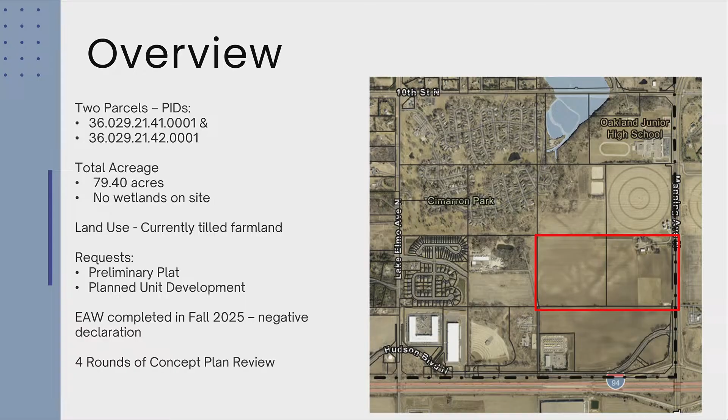So generally at a high level, what you're seeing are 679 residential units. This is an entirely residential proposed subdivision. Those units are broken out between 67 detached single-family homes, 60 patio-style townhomes, moving generally from left to right on the plan in front of you. Then 161 urban townhomes in the northeast corner, 3 multifamily buildings on the south side of the project, comprising 271 units total, and then 1 senior living building on the southwest or southeast corner, with 120 units proposed.

On the center of the site, just want to note, and we'll talk about this in more detail, but you're seeing a park area that's roughly 9 acres with stormwater ponding, adding to that open space in the center of the development.

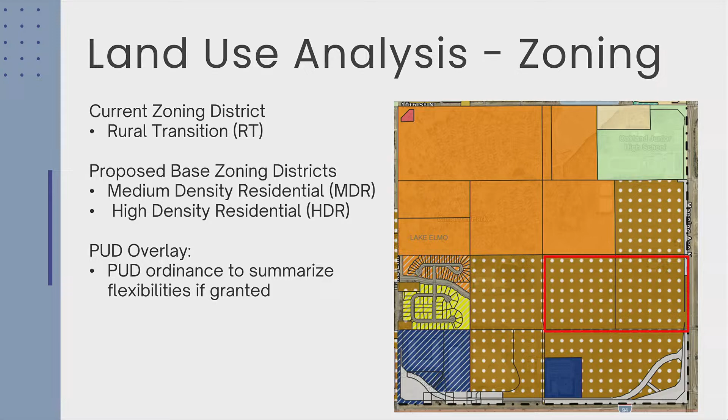So from a land use perspective, this site is currently zoned rural transition. As you know, that is a zoning district that is kind of a holding district for lands that are imminent for development. The future land use map has this land guided as a combination of high-density residential and medium-density residential. And we have a planned unit development proposed, so there'd be a PUD overlay from a zoning standpoint.

So when looking at the comprehensive plan, you have a pretty interesting line between the MDR and the HDR if you look at the site. Generally speaking, the intent when the comp plan was adopted was to concentrate the higher density development towards the south and the east side of the site, which is where that dark brown color is. The orange color is the MDR area, which transitions as you go to the east to low density.

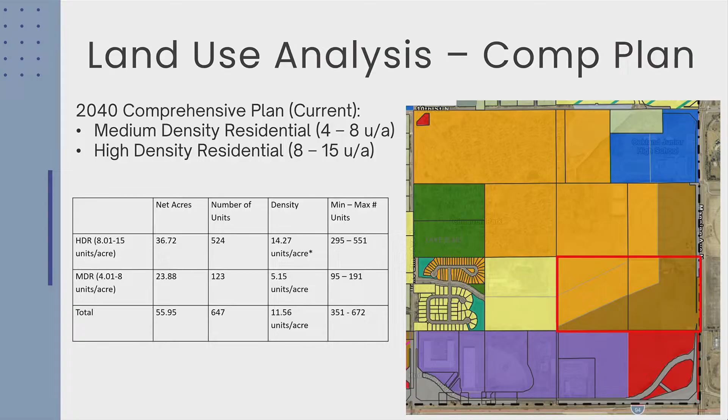But with the preliminary plat come all the preliminary plans, the development plans, those have been reviewed in detail to see whether they meet city ordinances.

Really just quickly want to cover planned unit developments. The city does have several different criteria in order for them to be considered. The first is whether the property is over 5 acres, and that one's met. At least 20% of the development has to be held as open space, which can look like common areas between townhomes and things of that nature. And lastly, the street layout has to maintain the existing street grid or meet the plans for future streets.

There are a number of PUD objectives that the applicant is basically stating in their narrative that they are meeting. Those are a range of different things, like providing a mix of different housing options in the city, and doing things like stormwater irrigation.

Now I'll just kind of jump into that preliminary plat review. When we're looking at a preliminary plan set, we are looking at a number of different things, and we'll walk through those here. So here's just a refresher - here is that overall site plan, and then I'm going to walk through each of the different elements that are being proposed here in a bit more detail.

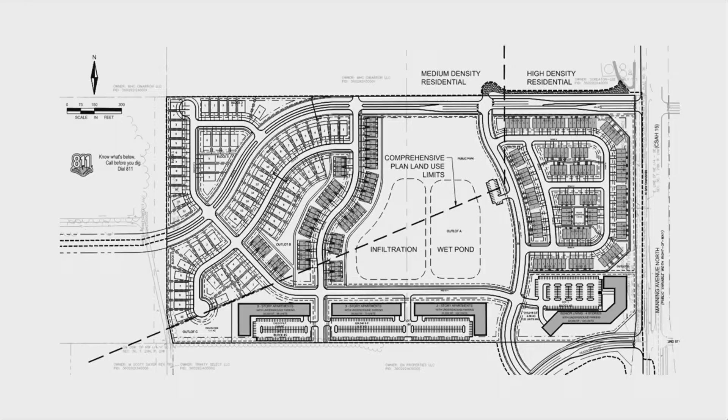First, you have the single-family homes. These are in the MDR, medium-density residential part of the subdivision. These are proposed to have 50-foot lot widths, which would be meeting the city's minimum. Pretty standard lot detail is shown here with those lots.

Next are those patio townhomes. These are the townhomes between the single-family homes and the proposed park area, kind of serving as a little bit of a transition as you go to the east. These are a little bit more standard townhomes, which you'll see around the city.

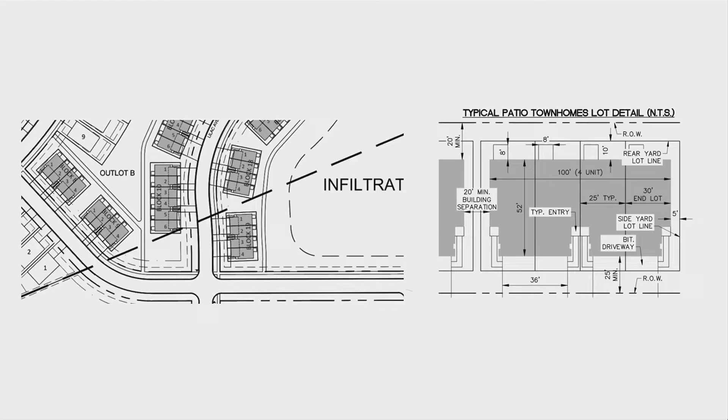We have 3 apartment buildings shown on the south side of the site. These are, at this point, I think there's no known developer for these apartments as far as I'm aware. And lastly, if you look at the southeast corner, you're adding in that senior living or age-restricted apartment building.

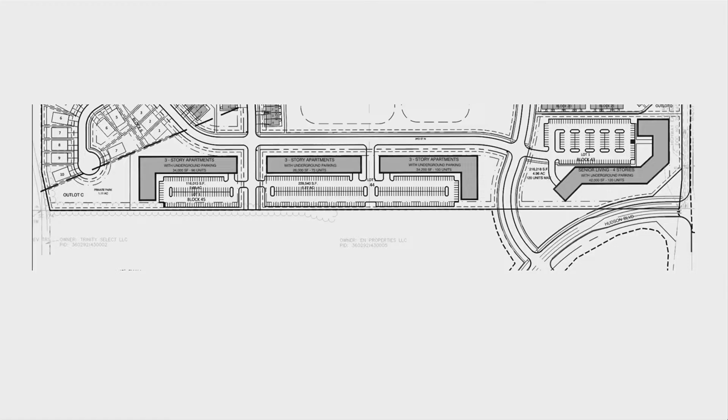And then here are what we refer to as those urban townhomes. I just want to make a quick note - what was included in the plans that were reviewed was an urban townhome with 129 units. In fact, the developer did provide a different layout that they actually prefer more. This layout was reviewed with the concept plans and it was reviewed with the environmental assessment worksheet when that was reviewed, so this has been reviewed already by the city.

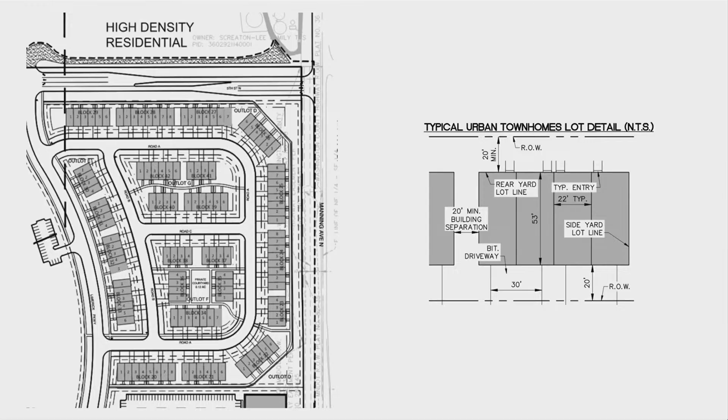This is the preference for the developer. They're going to be submitting an updated plan set. Generally, the differences are listed on the screen. So 161 units is what they are actually proposing. They're also proposing to have a larger private courtyard. In the site plan that you see on the screen now, you see just over 0.1 acres of private courtyard, so they're looking to increase that area.

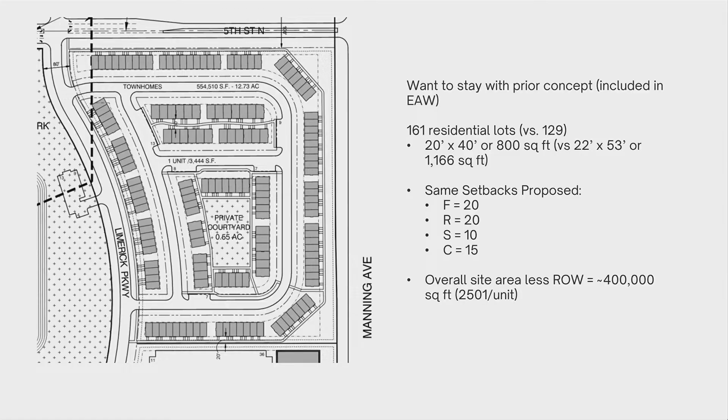And they are still meeting the setbacks that would be required in this area from just the zoning code. So there is a little bit of a difference - the units would be a little bit smaller, going from just over 1,000 square feet to 800. I did take a look at the overall site here. If you look at just the portions of the urban townhome part of the development minus the right-of-way, they are meeting the requirements of code to have at least - the requirement is approximately 1,700 square feet per unit.

I also really quickly want to touch base on the density for this development. That's been noted in the staff report. In February, we received a different methodology for calculating density for development from the Met Council. Because this development was planned largely before the Met Council changed that methodology, staff are proposing to use the methodology that this development was applied for under, which is showing here, and it's also indicating that the development would meet the overall density range for this area.

So I'm going back to these are the bulk standards, we call them, things like lot area, setbacks, etc. This is a planned unit development.

The developer is requesting a couple of different flexibilities from the city. First, just looking at the areas highlighted in the staff report - for the MDR, the single-family home lots are proposed at the smallest on the small end at 5,400 square feet, and they range up to some larger lots over a quarter or half acre. So it depends on which lot, but the minimum proposed is 5,400 square feet. The city standard is 7,000.

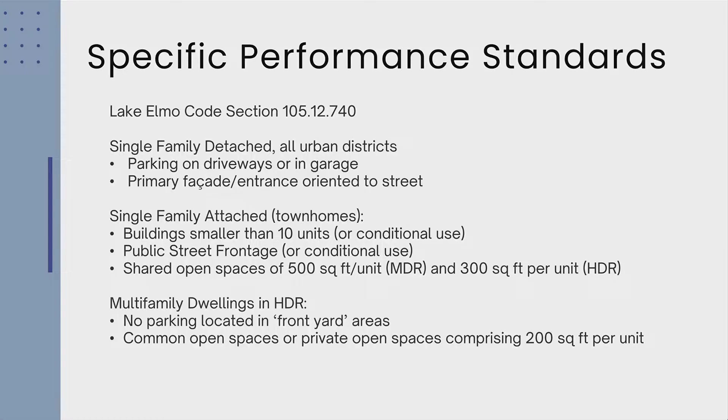What I haven't mentioned yet is that this project is not next to any existing developments - it's non-contiguous. So the developer is going to have some off-site improvements required to bring in utilities and road infrastructure to serve this new development. On the west side, that's bringing in a water main connection. And south of this site, the developer will also need to bring in water main, plus sewer to serve this property and realign Hudson Boulevard.

That realignment has been planned - it's been a long time coming in that area. The developer will accomplish that requirement through their alignment of the utilities serving the project, so that's been a requirement as well. They're also building Fifth Street North, which is a planned connection from the city's comprehensive plan. Fifth Street North runs on the north side of the property, and then as you go to the west, it curves down a little bit to the south.

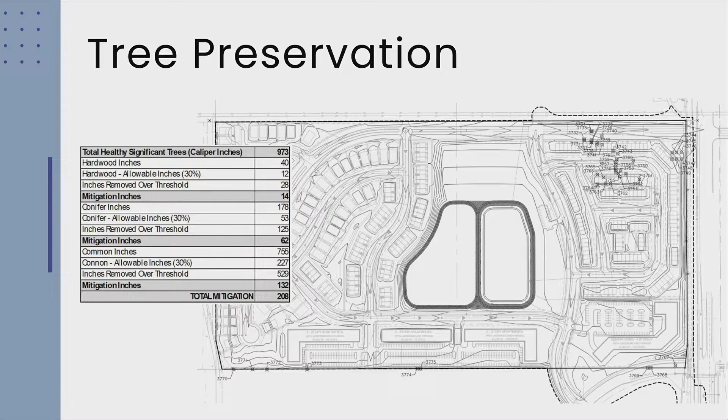Okay, so I want to shift into tree preservation and some of the other site considerations. There are a number of existing trees on site. Because of the way the grading will occur and the way the development is proposed, those trees would be removed. So there is a mitigation calculation that was provided with their plans and reviewed by the city's landscape architect.

The developer is also proposing to replace those trees with new landscaping. This landscaping would be provided throughout the project, and it would include trees that mitigate for the trees that would be removed.

Lastly, on this screen you can see some dark or shaded areas in the common spaces in the townhome and apartment areas of the site. The developer is proposing to use stormwater reuse, using stormwater to irrigate the common areas on the site. That has been a common theme in new development in Lake Elmo to help reduce water use from new development.

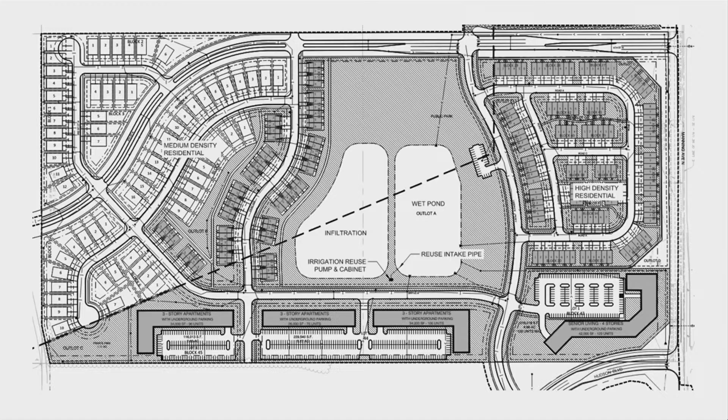So we've looked at a number of different plans. The landscape architect's memo dated May 18th does list a number of requirements that will need to be met as we move forward in the process, should there be an approval.

I also want to quickly note that buffering—the apartment buildings shown on the south side of the site—development that occurs south of those multifamily buildings, if it happens in the future, would need to provide some form of buffering or mitigation between a future use and the apartments.

We also looked at parking and traffic. Parking has been reviewed for the uses within phase one, which includes the single-family homes and the townhome units. Those definitely meet requirements, providing enough parking for both residents and visitors.

Where we have a need to review further in the future is definitely for the apartments, where we actually need a specific unit mix to assign a certain parking requirement. So when those projects are proposed and we have a known unit mix, that's the time we can really refine the understanding of what the parking requirements are. At this time, no flexibility is being requested for parking.

As far as traffic goes, this site and area has been guided as medium and high-density residential for quite some time in the city's comprehensive plan. The comprehensive plan does plan for the required infrastructure to serve these units with roadway and other infrastructure. The EAW also included a traffic analysis that was reviewed as part of the project.

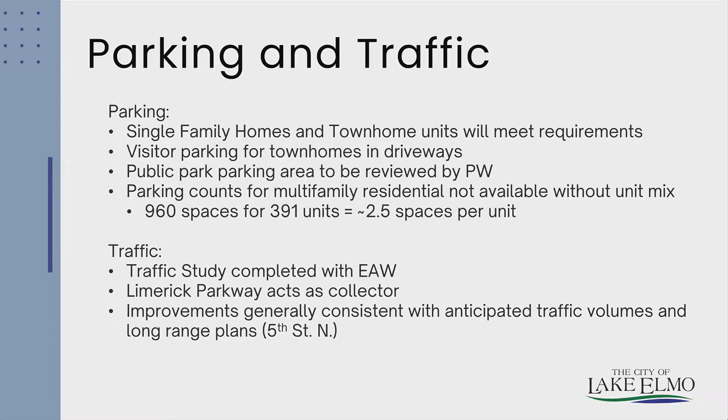All right, so access—I just want to talk about a few different things with respect to access. We've talked about needing to realign Hudson Boulevard. That's an important planned realignment and will provide key access for this development to Manning. There will also be construction of that portion of 5th Street North through the site, so those will be the two points of access that serve these units.

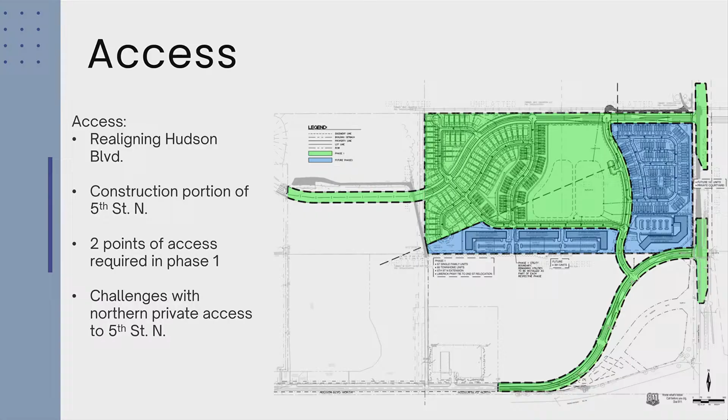And I do want to mention, there is an existing grain silo operation on the property just north of this site that creates a challenge for these plans and how that access can be retained. And so here is what is shown in the project plans.

You can see there's quite a long access from the right side of this image, where the grain silo operation would be, along Manning. If you go all the way, it's about 600 feet before you hit that next intersection. That's representative of the city's access spacing requirements, which are standard for 5th Street North.

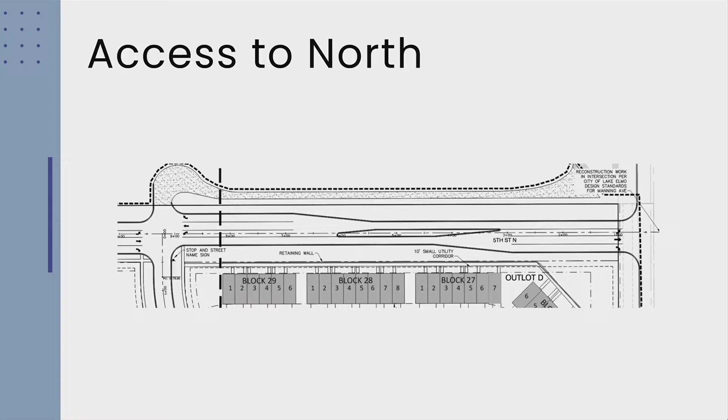What's being proposed right now by the developer, in conjunction with the property owner to the north that has the grain silo operation, is kind of an alternative access for the time being. It's a little difficult to see on the screen, so let me get a laser pointer to show up here.

As I mentioned, the property owner and developer have worked together on this proposal. What's currently proposed is an access serving the grain silo operation directly onto Manning, which would be a right out only. Serving this grain silo operation from the 5th Street North corridor would be an access directly from 5th Street North, which is a city road. Manning is county, 5th Street North is city. They're proposing a right in to the site here.

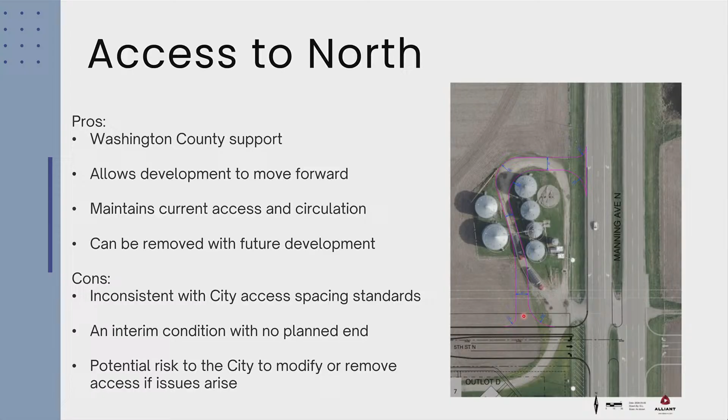That trail corridor should run continuously along the north side of 5th Street North through the project. That's been a long-term plan for that parkway through this area, eventually providing connectivity up to Oakland Middle School.

Parkland dedication.

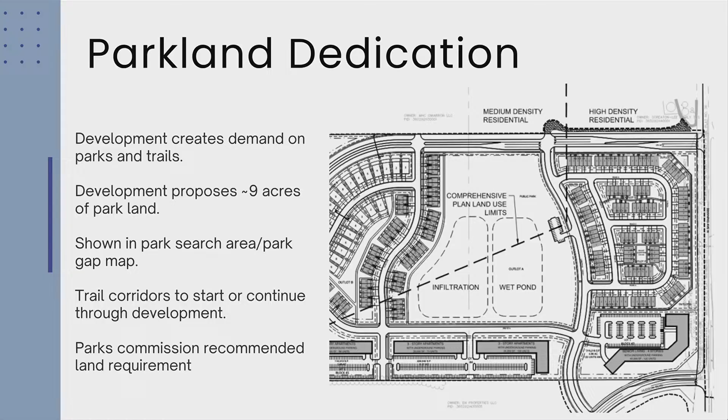This project proposes to dedicate roughly 9 acres of parkland that would surround two stormwater features: an infiltration basin and a stormwater pond. This part of the development would serve the residential units with parkland and recreation space, and would satisfy the city's park dedication requirements for this area. I'd note that this part of the city is within a park search area for a neighborhood park, and this park would generally meet the criteria for a neighborhood park, particularly in terms of size and area.

There have been a number of review comments provided on this development and lots of coordination behind the scenes. The city's fire department, city engineer, and city's landscape architect have all reviewed and provided comments included in the staff report. South Washington Watershed District is still in process for their review, and Washington County has also had an opportunity to review.

Just a quick summary of the proposed PUD flexibilities by the developer: number one, minimum lot size for the detached single-family homes, the townhomes, and the multifamily buildings, and then a side yard setback flexibility proposed for the single-family homes.

There are findings required to be created for approval or denial of a project. Those are generally summarized on the screen and included in the staff report. Staff generally feel that this development meets the city's criteria for approval in this part of the south growth area of Lake Elmo.

So you have a number of options in front of you: you can recommend approval, approval with conditions, denial, or table. Staff are recommending approval, but with conditions, and there are 12 conditions shown, generally summarized on the screen here and in the staff report.

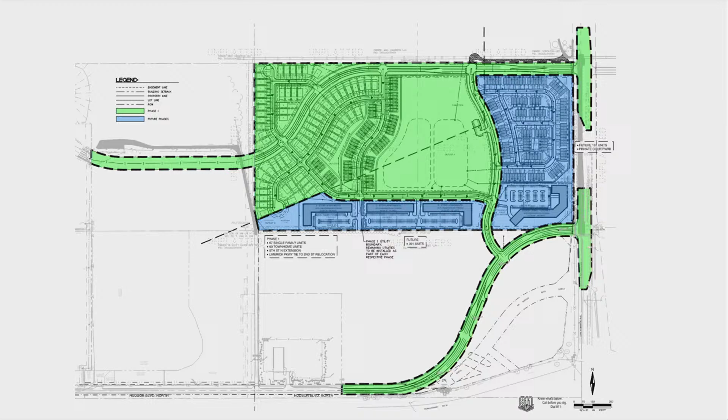How about the property to the west and south for the realignment of Hudson and Fifth Street? Are those private property owners on board with this, or does the developer control that property as well? That's a great question. The developer has been coordinating with those property owners. One of our conditions for approval would require that they get an easement agreement on the city's form. There's a big difference there, right? That would allow us to confirm they have consent from those property owners to do the offsite improvements.

And then when they're constructing the improvements, since that agreement would be in the city's form, the city would have the ability to go and do inspections and do those types of things. Gotcha.

Has a traffic study been done on the grain silo operation where you're effectively going to be routing grain trucks through residential areas with the proposed route to give them access?

Certainly, that's been an area of ongoing discussion. When we look at the grain silo operation, our understanding based on conversations with the property owner is that most of the semi-traffic won't amount to much per day. The peaks are relatively minimal in terms of traffic.

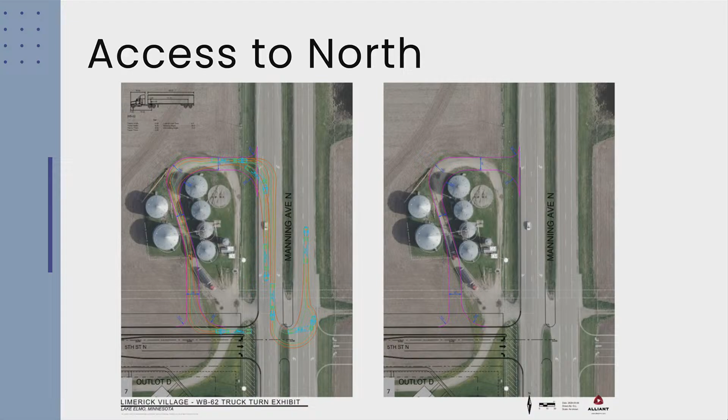Most of that traffic would be taking a right south on Manning to access the freeway corridor. I just know the county has a way of removing access from roads unexpectedly. Washington County has certainly been part of this review process. They've indicated they'll be issuing a permit, which they'll have to do for the project to move forward for access, so that's how they'll control that. The developers also had to talk with Washington County, so they might have thoughts on that as well.

So the quarter mile spacing isn't applying in this case, because they're giving them a right-turn exit. Typically, when you're looking at a permanent new development, you'd go for quarter-mile spacing or less in some cases, depending on the context. But because this is a somewhat unique condition with this grain silo right there, and wanting to reasonably retain their access for their operation, they're asking the city council for some flexibility.

As for the developer's cost, yes, the developer will be responsible for reconfiguring the access.

So with the new Met Council density calculations, isn't this too dense? The density is above and beyond what's required. The reason for that is because the developers would technically not be able to net out the stormwater pond and the Fifth Street North corridor. So technically you're right, but the density functionally hasn't changed from when the city reviewed this before. Right, but by the new calculations, we're exceeding the density requirements with the new methodology.

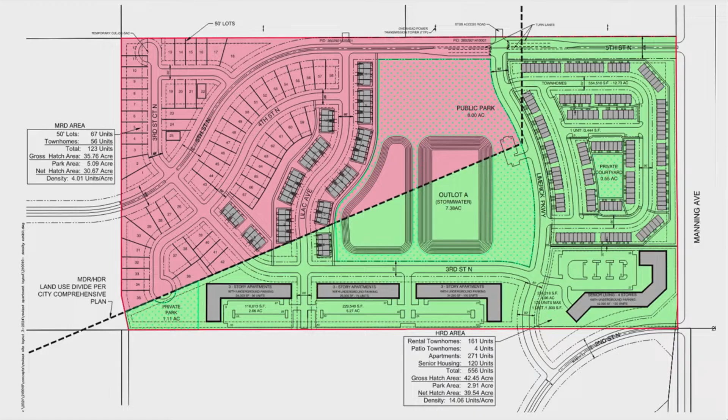They're in the HDR, the high-density part of the site. But when we look at density, we don't look at one individual part of the development. We have to look at the overall area of HDR, high-density residential, which in this case has a unique shape. Part of the reason for those four concept plan reviews is because they have a really funny line here, and the developer worked hard to not propose a comprehensive plan amendment, so this development could use the existing plans the city has in place. They've had a challenge trying to meet that boundary, and that's part of why it feels like they're high on one side and low on the other, which bears out when you look at the density ranges here.

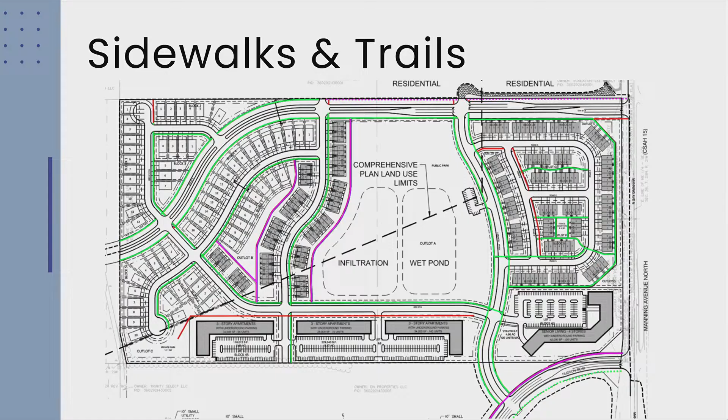One more question on Manning—is there going to be a trail on Manning at all? That's a good question. Right now, as far as we know, looking at an aerial, there's no trail along the west side of Manning. At some point in the future, the county may have a trail, and I think usually the county's standard is to have a trail on both sides. Oh, okay, so that'll be up to the county. All right, good, thank you.

Thank you, Nathan. Let's try and find a site plan for the developer to speak to. Does the developer want to speak?

Thank you, Mr. Chairman and Commission members. My name is Mario Cucciarella, I'm the owner of Maplewood Development Company, and I just have a few comments since there's been a lot here.

First, let me answer the question on the trail before I forget. The county is going to require a trail section on the eastern end of the property, but on the west side of Manning, we already know that. The ditch can be constructed for stormwater management such that the trail can be built too, so we'll be able to do that.

Just a couple points I want to make. I know you're not familiar with us, but I'm proud of the fact that we've done a lot of master plan communities and big projects—we did the Willowbrook project down in Oakdale, Amber Fields in Rosemount, Southwest Crossroads up in Maple Grove, and many lots in Woodbury. So we have some experience, and I think there's value in having one master plan for an area like this, so you can really see what the future holds for those sections of the site.

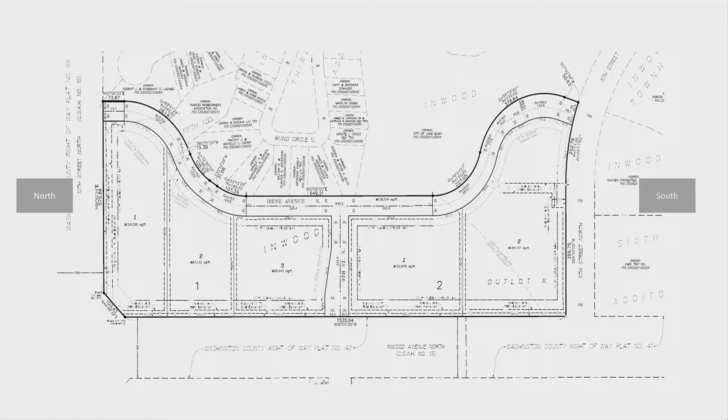For an application like this, staff is reviewing land use and zoning, bulk standards, tree preservation and landscaping, grading, stormwater and wetland impacts, public infrastructure, and park dedication. And then I will note that this is not a PUD, so there are no flexibilities being requested. They're meeting all of our zoning regulations.

So specific items to highlight for this request include land use and performance standards. The application before you tonight is not proposing any tenant approvals, so no buildings, no parking lots, no users. Those will all come forward at a future date and receive necessary review and land use approvals at that time. So they did ghost plat buildings on some of the plans, just to show that the lots could fit a parking lot and a building, but that's not necessarily the layout that would be at the end of the day.

The next item to review is traffic, access and parking. Again, there are 2 streets, one north-south, one east-west. There are 2 county access points with this proposal and 1 city road access. The right-of-way is 60-foot wide and the proposed street is 28-foot wide. Because there are no tenants, we would review off-street parking based on the use at the time the tenant is proposed. There is no signage proposed here, so we would review that at the time with the tenants. Park dedication for commercial is a set fee based on the acreage of the lot, so we'd be looking at just over $100,000.

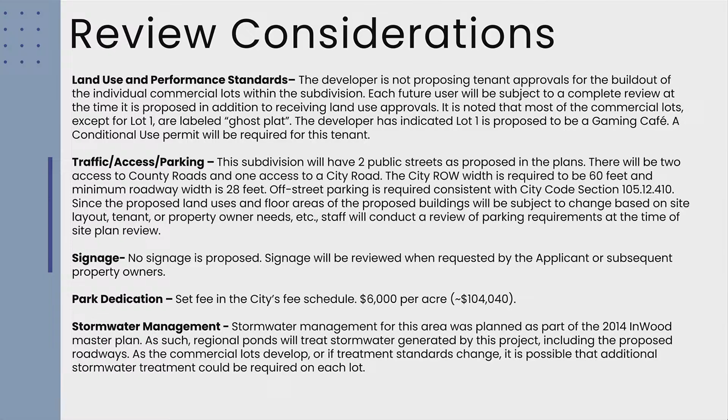And then stormwater management: again, this parcel was anticipated to be commercial in that 2014 master plan, and as such, these stormwater facilities have capacity built into them to accommodate for this impervious surface.

Looking at shoreland overlay, because it is within the shoreland overlay, the parcels are only allowed 30% impervious surface, which is hard cover—buildings, parking lots, sidewalks, anything where rain can't get immediately into the ground. This is far less than our typical commercial development; typical commercial land use allows up to 75% hard cover. So just by being in the shoreland overlay, you're going to have a lot more green space on these parcels than you otherwise would. And a note that because it is in a natural environment shoreland overlay, a CUP is required for the commercial uses here.

Looking at landscaping, there are minor revisions required to the landscape plan, and no tree preservation plan is required here because there are no significant trees since the site was mass graded in 2014. There are boulevard trees that would be required at the time of subdivision and improvements, and species include maple, hackberry, locust, coffee tree, oak, elm, linden, spruce, pine, crabapple, and lilac.

Just a note on screening and buffering, since I received a few questions on that. Landscaping and screening will be required on each lot as they develop. There's really nothing to screen at this point since there are no buildings or parking lots with this proposal.

So it's not necessarily a berm, it's just showing generally where landscaping or fence would be. It could be anything that provides 90% opacity at 6 feet high. I guess what I'm wondering about is what's going to block 9th Street from those 2 houses.

Houses number 11 and 12, since there's nothing there. Those seem to be the ones that are going to have the greatest impact. The homes on Irving Circle, number 11 and 12, are right where 9th Street comes in. It's possible that the red area is just a general line I had drawn, and it could curve down to block headlights as they turn in.

And the green on there are trees proposed to be put in by the developer, correct. The purple is to achieve screening, already existing landscaping on those lots, correct.

Is there anything that says the screening couldn't be done on the north side of Irene? In the purple area, correct, it's off the east side of Irene - sorry, east side of Irene, my bad, I forgot we're flipped. So it's off the developer's property, so they need to get consent.

I think part of that's a city pond, so we'd have to work out some logistics there. Then you're running into personal property, and then that would be - yeah, probably. Well, we're talking about 9th Street with cars pulling in.

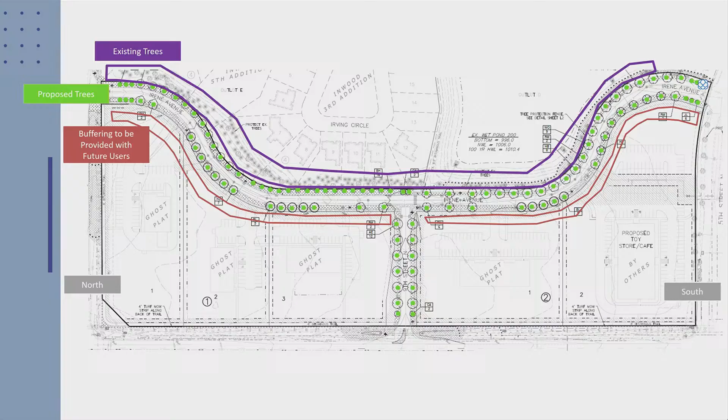So what do we propose? I don't know. Some small retainer right there, or like a brick wall with maybe a sign for the development on it, something that looks nice. I don't know that you're going to be able to solve the problem for everybody with all things. It is what it is. I think beyond natural landscaping, it is what it is given the location of the road and the property lines.

Well, here's a benefit, if we can look for the silver lining here: these are 30% impervious commercial lots. That's really significant—normally they'd be what, 70%? So it's going to be much more of a green space development for those commercial lots. I'd have to look at that while keeping the balance with what we've got going here.

And the hardest thing is determining means and methods, since the standard is 90% opacity, whether that's natural landscaping or a physical barrier. It's not for us to determine how that is done—that's up to them to propose how to meet that standard. Could we apply that standard to the proposed plantings or buffer on the east side of Irene?

Just say there needs to be a 90% opacity barrier on the east side of Irene. I'll second that. So whether it's conifers, a retaining wall that's 3 feet high—can we get that language as an amendment to add to this? So you want to say it again?